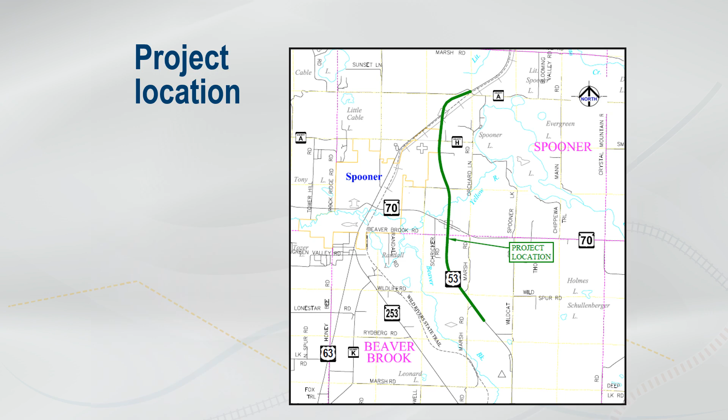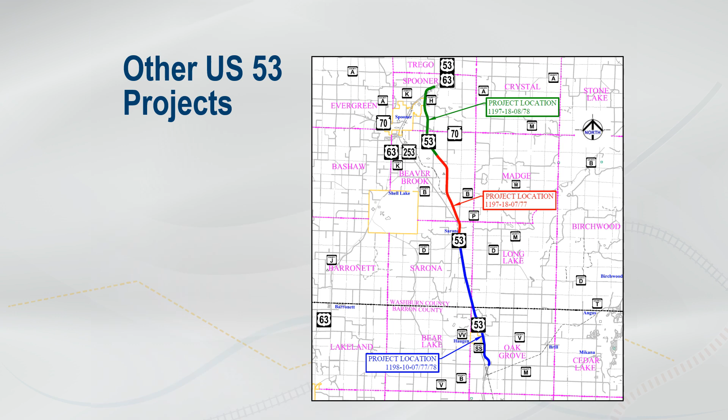The project between Wildcat Road and County A is part of an overall improvement plan to replace the pavement along US 53 extending from 26th Avenue in Barron County to County Highway A in Washburn County. As you can see from the colors shown on this map, the improvements are planned under 3 separate projects. The section between Pine Grove Road and Wildcat Road, shown in red, is planned for construction in 2023. The sections shown in blue, extending from 26th Avenue to Pine Grove Road, and the section shown in green, extending from Wildcat Road to County Highway A, which is the project we're discussing in this presentation, are both planned for 2024. All projects could be scheduled a year ahead of the current plan, pending the availability of funding.

US 53 is an important highway route in northwestern Wisconsin. It is part of the national highway system, signifying its importance to the overall transportation system. It serves as a truck route, including movement of oversized, overweight loads across Wisconsin, serves local commuters and businesses, as well as provides an interstate link to Minnesota. Wisconsin DOT's objective is to ensure safe and efficient operations along this important route while also supporting local access.

The primary need for the planned project is due to pavement deterioration. US 53 was originally constructed as an expressway in the mid-1980s and has undergone rehabilitation of the concrete pavement as well as asphaltic overlays back in 2015. There is cracking and rutting of the existing pavement due to the poor underlying concrete pavement, and the pavement is nearing the end of its service life. In addition to the condition of the US 53 pavement, we are also experiencing deterioration on the bridges along US 53, including those that pass over US 63, the Yellow River, as well as on Highway 70 over US 53.

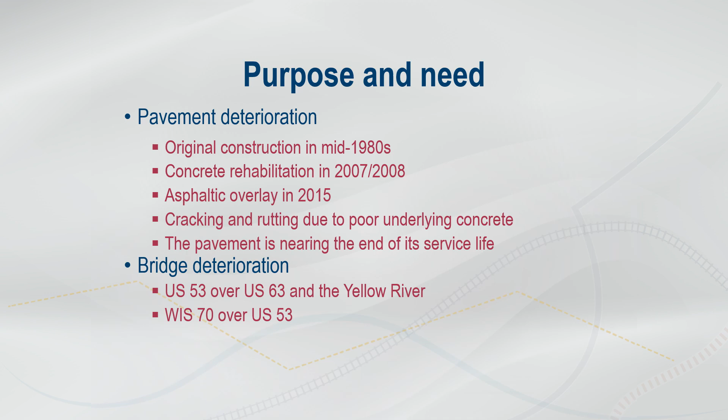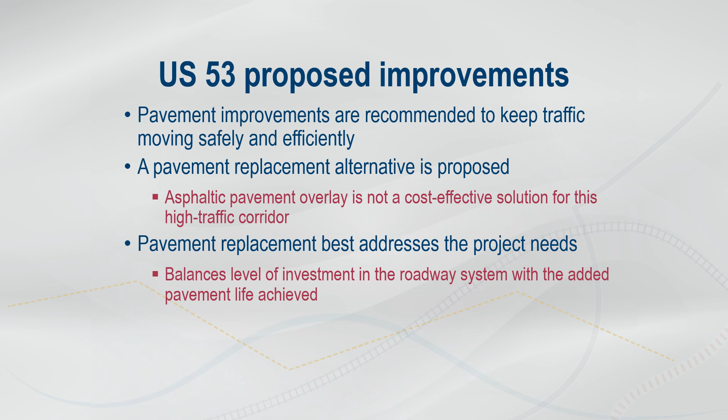Pavement improvements are planned along this section of US 53 to keep traffic moving safely and efficiently. A pavement type replacement alternative is proposed along US 53 as well as at the US 63 and Highway 70 interchanges to improve the performance of the pavement. An asphaltic overlay is no longer a cost-effective solution for this very high traffic corridor. The pavement replacement best addresses the project needs and balances the level of investment in the roadway system with the added pavement life that will be achieved through this improvement.

The proposed US 53 improvements include placement of new concrete pavement along US 53, the interchange ramps at US 63 and Highway 70, as well as replacement of the pavement on Highway 70 between the interchange ramps. The footprint of the proposed improvements is shown on the exhibits available on the design website. The pavement replacement will require that we remove the existing pavement and replace part of the aggregate drainage layer. We will be maintaining all existing alignments and travel lanes, as well as existing intersection and interchange configurations.

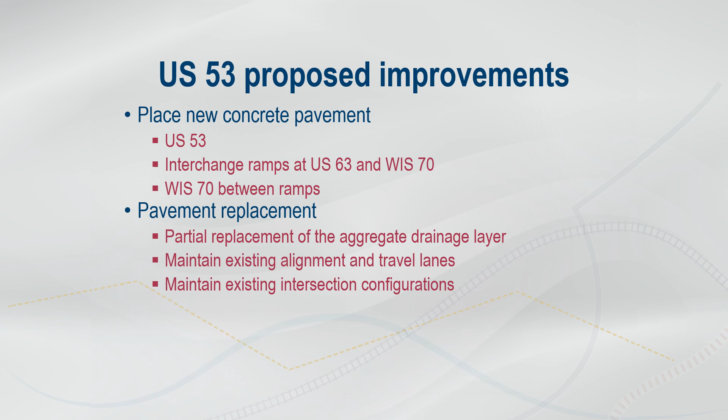The project improvements will also include repairs on the existing bridges. These will include concrete overlays as well as other miscellaneous repairs. Wing walls will be replaced at the Yellow River, and anti-skid surfaces will be added on the US 53 bridges over US 63 to minimize ongoing crashes. Other improvements include repair of deteriorated culverts, replacement of right-of-way fencing where warranted, and installation of new pavement marking and shoulder rumble strips to maintain safety along this project.

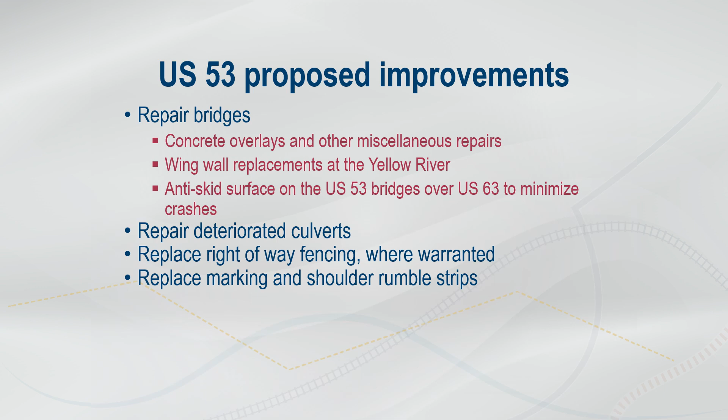The current construction schedule for the project is planned for 2024. Pending available funding, construction could be advanced to 2023. Construction is anticipated to take one construction season, usually extending from April to November, and some finishing work may need to extend into the following spring, depending on weather. Maintaining safety and mobility during construction are a high priority. With the traffic volumes on the project, we can maintain traffic safely and effectively with one lane in each direction.

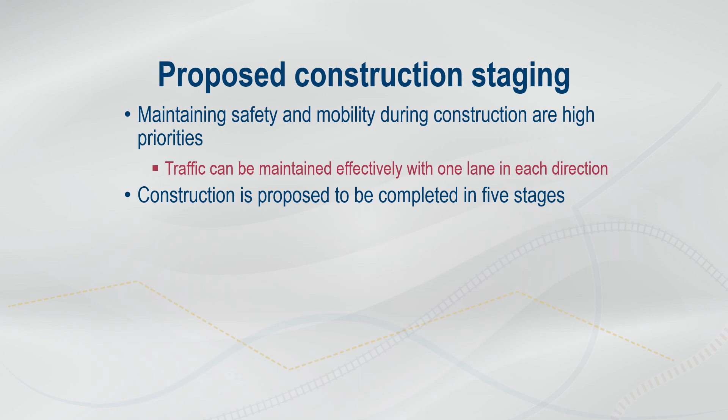Construction is proposed to be completed in 5 stages. Stage 1 will consist of some temporary intersection modifications at County Highway H and County Highway A along southbound US 53, as well as constructing temporary ramp crossovers at the US 63 and Highway 70 interchanges. For this stage, traffic will be located on their existing roadways and will be managed with single lane closures.

In stage 2, we will construct a new pavement along northbound US 53. We will manage traffic with a single lane, two-way traffic located all on southbound US 53. We'll construct the northbound ramps as well at US 63 and Highway 70.

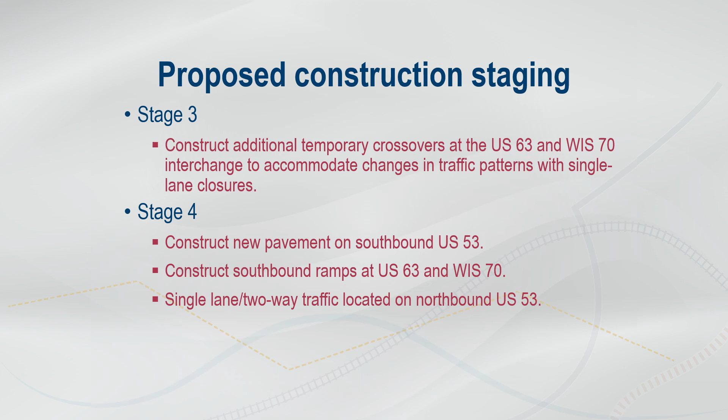In stage 3, traffic will be maintained on their existing alignments for both northbound and southbound US 53 under single lane closures. In stage 3, we will construct some additional temporary ramp crossovers at the US 63 and Highway 70 interchanges in order to accommodate traffic patterns in stage 4.

In stage 4, we will construct new pavement on southbound 53. We will also construct the ramps at US 63 and Highway 70 in the southbound direction. For this stage, we will also maintain traffic under single lane conditions with two-way operations located on northbound US 53.

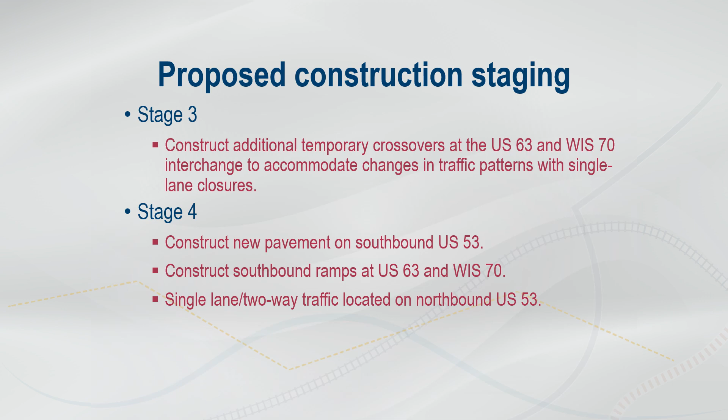In stage 5, we will put traffic back on their existing routes for both northbound and southbound US 53. We will complete any remaining median work or other work not completed in previous stages under single lane closures. The staging discussed in the previous slides is also demonstrated in the construction staging typical section shown on the design website.

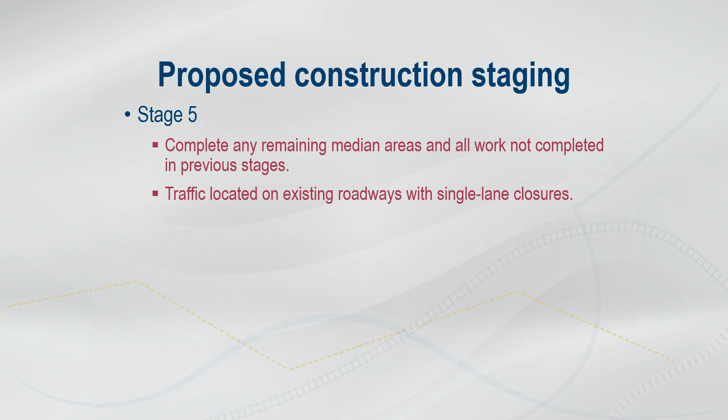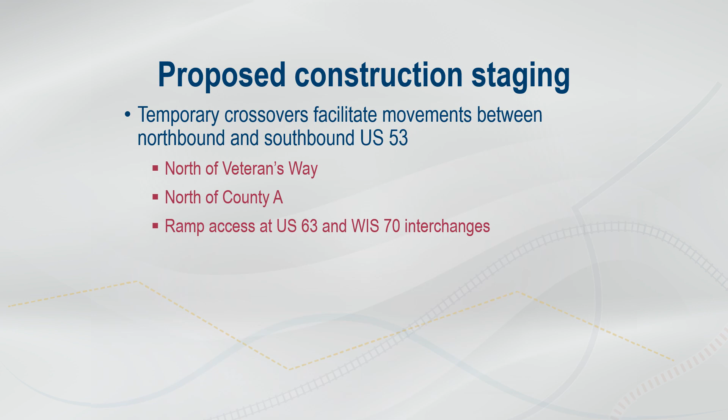To facilitate traffic movements between the existing 4-lane traffic conditions and the temporary 2-lane conditions that are planned, there will be mainline traffic crossovers located north of Veterans Way and north of County Highway A to facilitate those traffic movements. In addition, as I have noted, temporary ramp access will be constructed via temporary crossovers at both the US 63 and the Highway 70 interchanges for access throughout construction.

The US 63 and Highway 70 interchange ramps will undergo short-term closures in order to complete the proposed project work. A 2 to 4 week closure is proposed at each ramp. The US 63 and Highway 70 ramp closures will not occur at the same time to ensure that we have proper circulation and access around the city of Spooner.

Also, the interchange ramps will be open for peak events such as the Spooner Rodeo and the Washburn County Fair to ensure that we minimize impacts to traffic during these important peak periods. Highway 70 itself will be open to through traffic at all times with lane shifts and narrowed lanes.

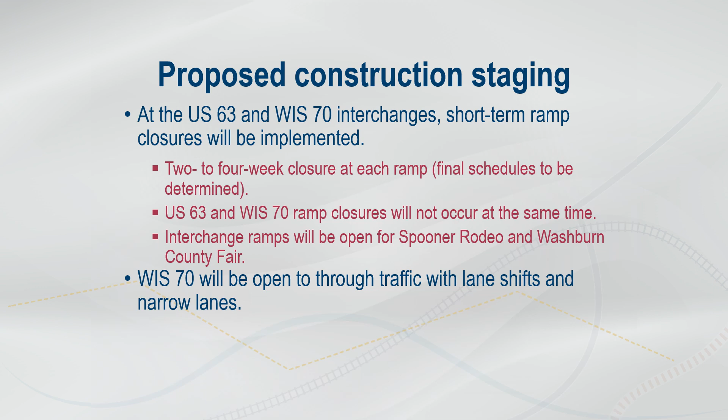As part of the project staging to carry bidirectional traffic on US 53, we will plan for temporary intersection modifications to provide for protected left turn lanes at both County Highway H and County Highway A. The other intersections along the project will remain open during construction.

We also will maintain recreational traffic on the Wild Rivers State Trail, which is parallel to Highway 63 and passes under US 53. All driveways along the project will be maintained and may be restricted to right-in, right-out type movements.

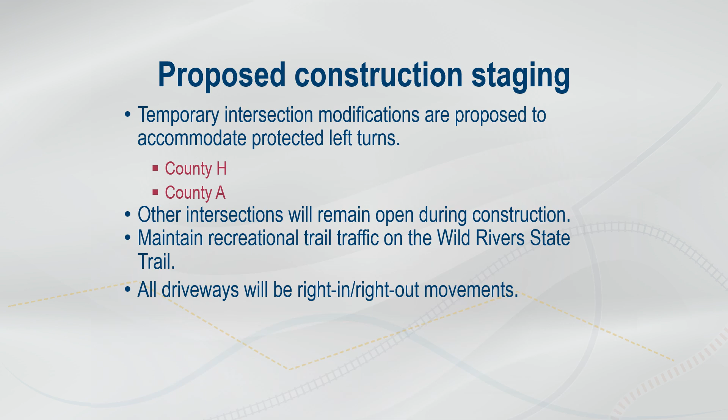The US 53 pavement replacement work will be completed inside of the existing right-of-way. Some of the right-of-way fencing will also be replaced where required. In the cases of replacement, those include sections that are deteriorated or are falling down. Some of the existing fence is located outside of the existing right-of-way.

These areas are identified on the exhibits that are on the design website, showing the fencing in red color. The new fence will be replaced within the existing right-of-way in the areas identified. If there is a location of fencing that requires replacement and the existing fencing is on private property, Wisconsin DOT will work with the property owner to obtain a construction permit to remove the existing fence.

We are here with you today for the public involvement meeting in May of 2020, gathering any input requested by June 4th. We'll then take that input and prepare our final environmental document for completion this summer, as well as preliminary plans. Our final plans for the project will be completed by May of 2022, and as noted, construction is planned for 2024, but could be advanced to 2023 depending on available funding.